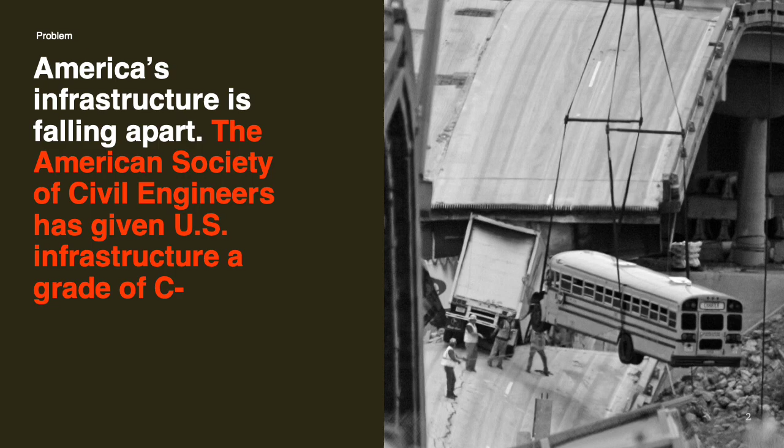The American Society of Civil Engineers has given us, our national infrastructure, a grade of a C minus. And just to put that into perspective for you, if our concrete infrastructure was trying to graduate college, it wouldn't have a high enough GPA to get a diploma. That harsh reality that I keep talking about is failure is not an option in our industry. When concrete fails, things get ruined, people die, it's a bad situation.

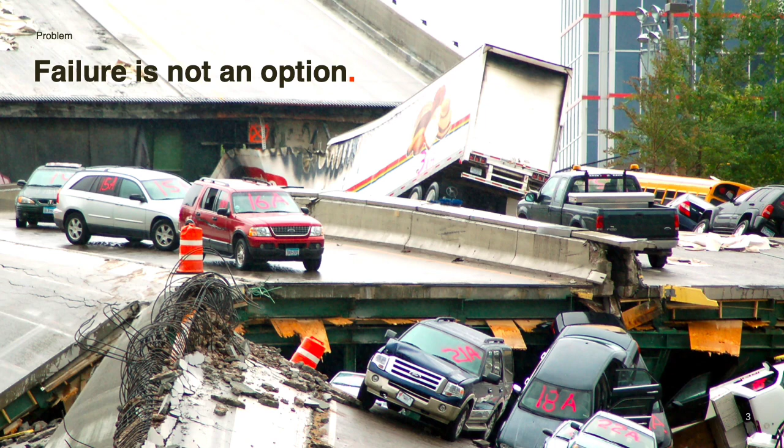Now, I'm not trying to say that the concrete industry is broken, but let me just give you one more fact here. Setting the stage, there are over 600,000 concrete bridges in our national inventory. This establishes a yearly budget of $48 billion into the concrete industry. Now, an additional $8.3 billion is put back into concrete every year to deal with the maintenance associated with physical and chemical attack.

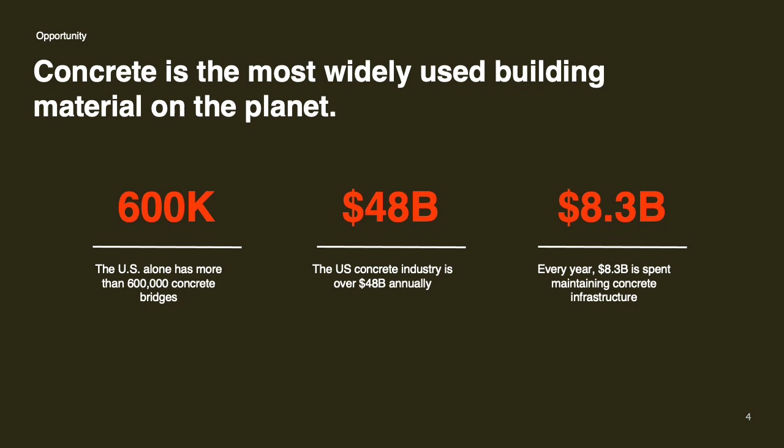Now, let's say I bought a truck for $50,000. And the first year I had that truck, and each year after that, I had to put in an additional $8,000 to deal with the maintenance associated with physical and chemical attack. Now, more than likely you would have a Ford, but taking it down to that level, we can all see that there is a problem that needs to be fixed.

The good news is that there is a solution to our concrete infrastructure problem. Take a deep breath. We know that the root cause of decay in concrete is concrete's molecular structure. I choose the pictures on here for very specific reasons. I want you to be interested in this, and I want you to see the science as not only one of our biggest obstacles, especially with things that we can't control like the ambient environment, but something that we can take advantage of.

What we know is that essentially concrete is a hardened sponge. Water, salt seeps in, evaporates out. Some of the salts stay behind, some of the water stays behind. You have volume change that leads to cracking. And deteriorated concrete from cracking is at the root of America's infrastructure problem, our challenges. And all of that is the concrete molecular structure.

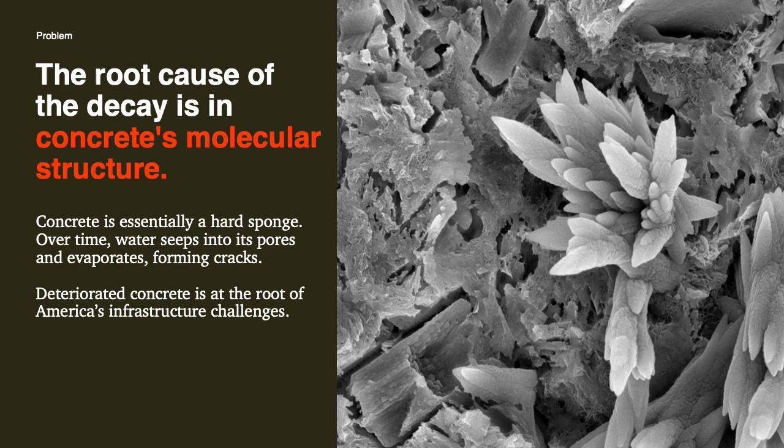Now, over time, this water migration and the salt deposition that I was talking about, those contaminants cause the slow breakdown and deterioration of concrete. Whether you're in Denver, on the left with alkali silica reactivity, breaking down the concrete from within, or if you're on the right in Tampa dealing with brackish water, chlorides and sulfates causing anything from calcium oxychloride formation to sulfate attack, reducing that cover of concrete over the steel and ultimately breaking down that reinforcement of concrete.

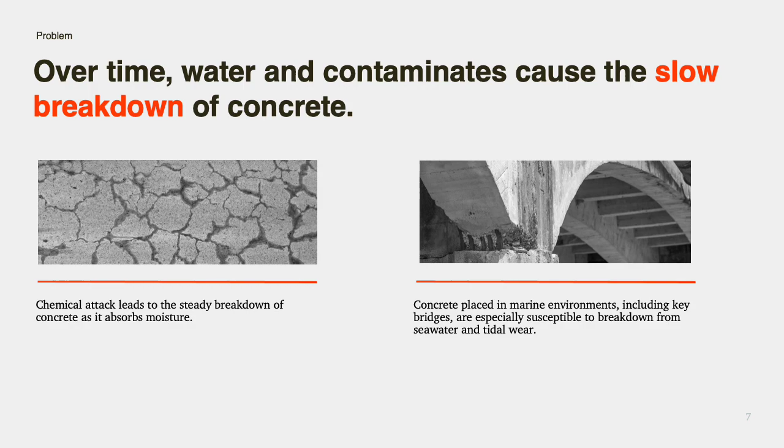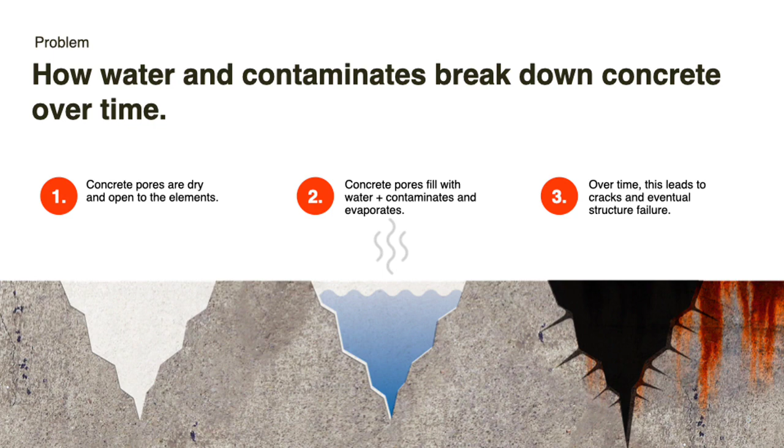And what that vicious cycle does, as I said earlier, is cause a volume change. And concrete doesn't like that volume change. On a scientific scale, you would say these atomic dislocations are not elastic, they're more plastic, and they tend to snap and pop, break and crack, creating more of that porous nature. And that water, those salts, ultimately reach the reinforcing steel, which causes that corrosion and bleeding and the contaminants and that vicious cycle I mentioned at the beginning of this slide.

We talked about a solution, and it's taken me 9 slides to finally get to that solution, but I wanted to paint that picture, not just the rudimentary illustration, but the water plus contaminants, because that's what hydrogels take advantage of. When we have a hydrogel, we're not putting it into brand new concrete. We're using it as a topical additive for deteriorated and damaged and cracked concrete.

The hydrogel technology is sprayed liberally onto the exterior of the concrete surface, and it seeps into concrete pores. Now, most hydrogels require a saturated surface dry condition for the concrete so that you have that known combination of water and those contaminants. And those contaminants, chlorides, alkali, sulfates, iron oxides, carbonic acid, could be a whole slew of things. The hydrogel solution interacts with these contaminants

and interacts with them in a way that starts developing that hydrogel technology that was originally in a liquid solution into a stacked 3-dimensional microstructure that has strength-bearing components to it, the very same strength-bearing components, assuming you have the right technology, that we find in our parent binding matrix, the calcium silicate hydrate. And over time, these hydrogels transform into more of that superhero, that backbone of concrete strength to heal those concrete pores.

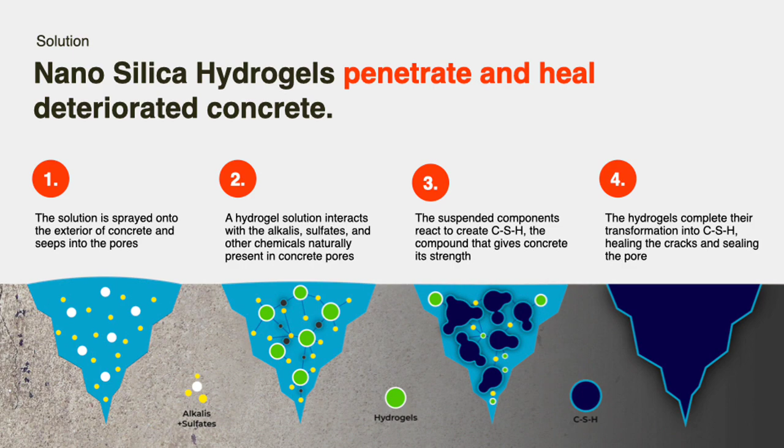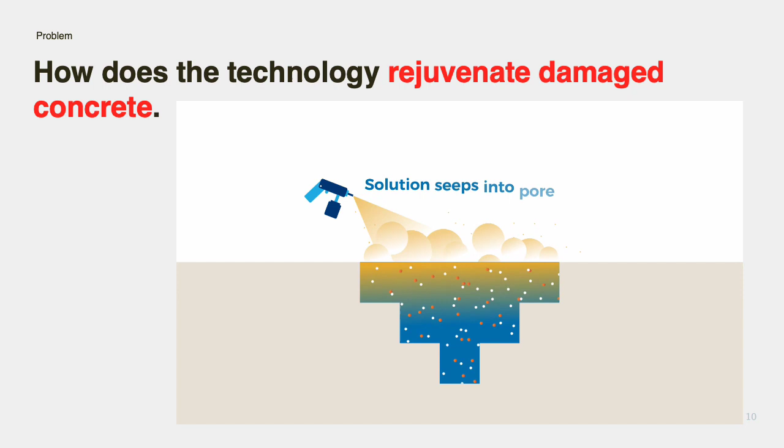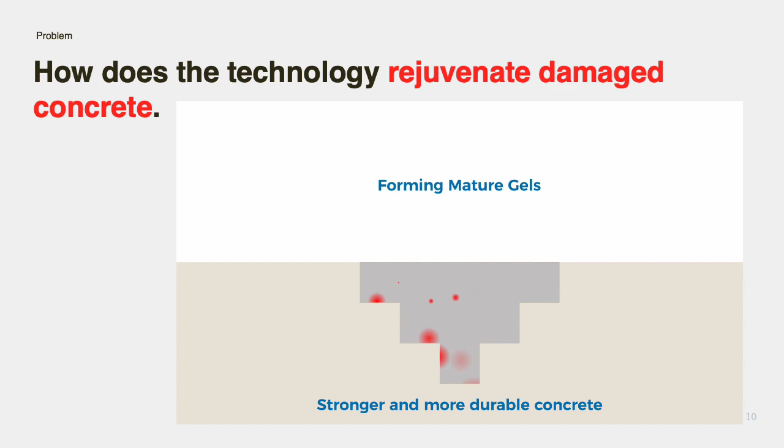Got a little animation here. So when we're using the technology, we have a concrete pore, saturated surface dry condition. We spray on the solution. It seeps into the pores, and this is where the polymerization process goes. Our immature gel leads up to a mature gel that ultimately makes a stronger and more durable concrete.

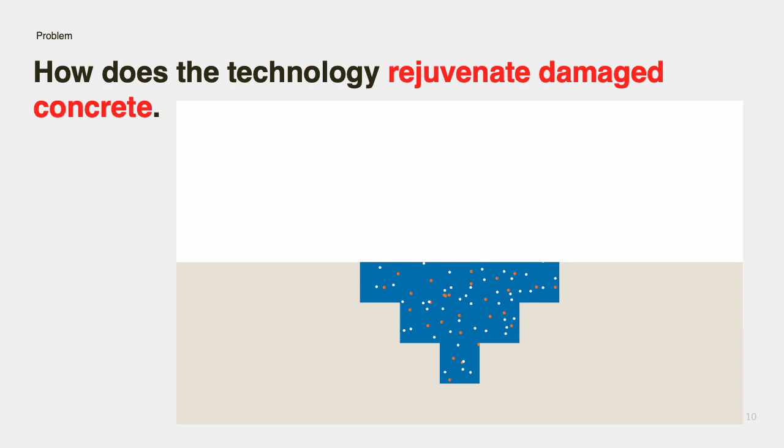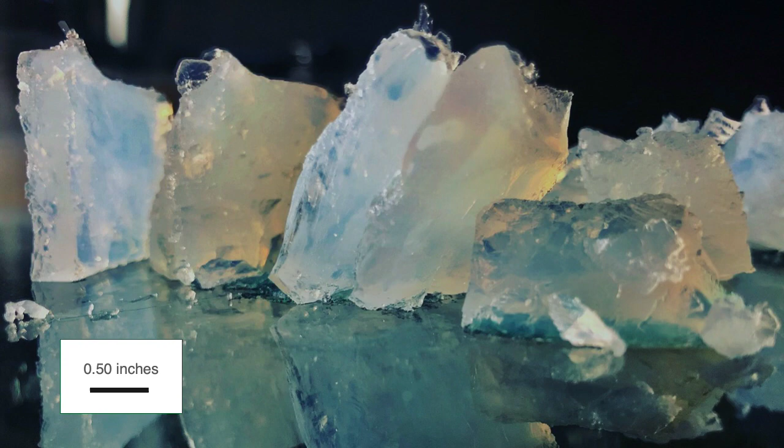When we get a chance to look at the hydrogel in a laboratory setting, this is the hydrogel. I mean, this is a few minutes after it's been combined with the simulated cement pore solution, and it has gone from a sprayable liquid to this hardened gel. And the hardened gel can hold its own shape. It can bond to the deteriorated and cracked and corroded materials in the composite structure of our concrete material, and ultimately lead to our biggest problem in the concrete industry.

We see this solution from the side of the engineers and the architects that hey, we're going to design a bridge that is going to last 50 years. And what that ultimately does to us is it forces a promise that we're going to keep a bridge or a concrete structure in place for this X amount of time. And if we don't keep it in place, then we fail at meeting that objective. So we find that our engineers in the different DOTs, as well as those municipalities, those marine entities, have to hobble the structure along. And we'll get into one of those case studies here in a second. In lieu of tearing it out, here's a great example.

The hydrogels have been found to extend the life of a bridge or a concrete infrastructure by 15 to 25 years, even if they're at the end of their design life, by taking advantage of that cracked and deteriorated environment. The increase in usable life of concrete pavements and infrastructure has also been seen to be increased by 30 and 50%.

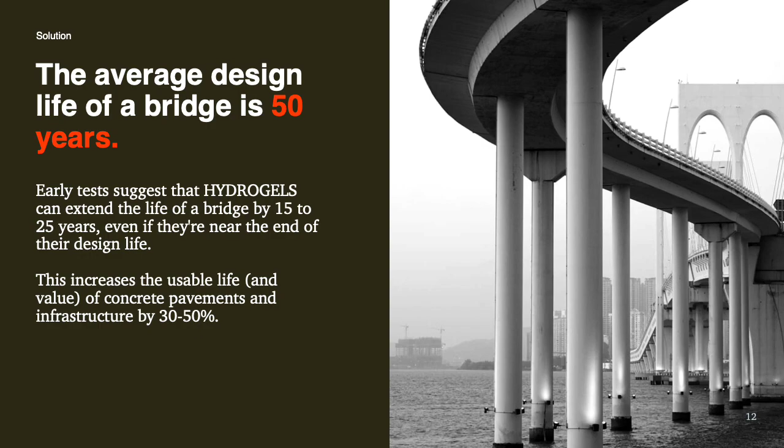And one of the projects that we're running in Fort Wayne, Indiana, is a concrete tunnel under a concrete highway. It was built 2002 and was going to be demolished, but with the help of the hydrogel technology that we've used here, and specifically this is a combination of products from Edyston, we found that we could effectively manipulate the molecular kinetics of this cracked and deteriorated concrete to slow the mechanics that cause this deterioration. You can see from this picture that we've got concrete on the floor. From the ceiling, you can see this cracked and deteriorated concrete.

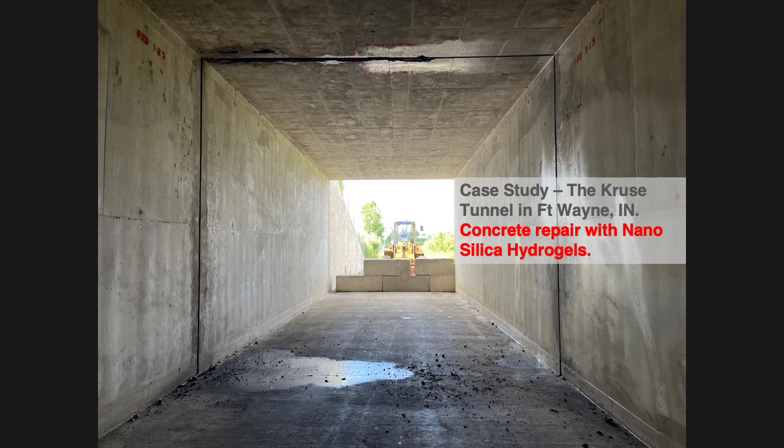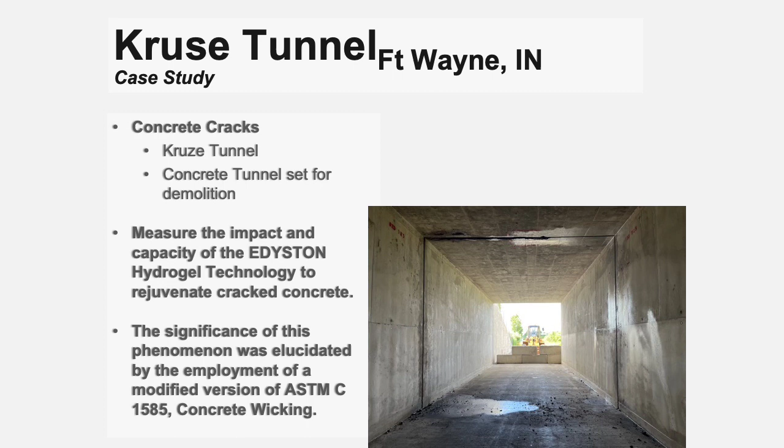Let me get into the case study. It was a Kruse tunnel. The concrete tunnel was set for demolition. Our job was to measure the impact and capacity of this Edyston hydrogel technology to rejuvenate cracked concrete. Now, significance of this phenomenon was elucidated by the employment and deployment of a modified version of a concrete wicking test. And we went out to the job site. We were able to show that the technology is extremely easy to use and fast.

The prep and application includes power washing the concrete to remove excess salt and weakened concrete. You allow the concrete to get to this saturated surface dry condition, this SSD condition, and then in multiple passes of 500 to 750 square feet per gallon, you're applying the hydrogel or Edyston technology to an ultimate dosage of 125 square feet per gallon.

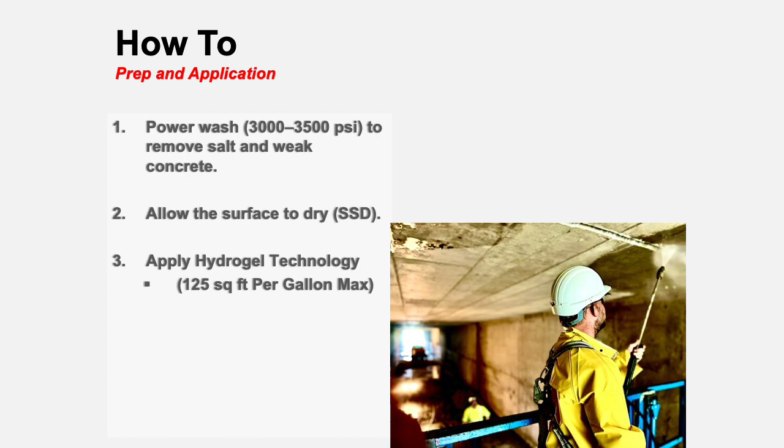And what we did for this Kruse tunnel project, we had 7 full construction joints over a total length of 400 feet. The construction joints were spaced 40 feet apart, and they were 14 feet tall by 16 feet wide. To evaluate how the Edyston impacted the concrete, we had a reference side. So every joint, we had a side where both sides were clean, but we had a side that we applied the Edyston, which you see is the left-hand side here, where it was cleaned and the Edyston was applied, and the right-hand side where it was only cleaned.

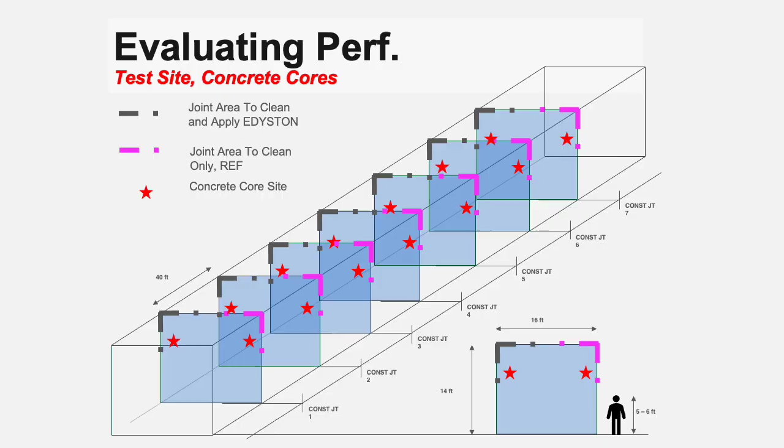Later on, 4 months after our application process, we came back, took some cores, took some pictures, and we measured the wicking or the concrete sorptivity using ASTM C1585.

So we had a number of joints where we used different types of the Edyston technology, but the ultimate combination based on the deterioration was a use of two different types of hydrogels that not only densify the permeable deteriorated matrix of our concrete composite, but also use the impurities to create that healing matrix that can be comparable in strength and durability to the parent material. Here was the dosage of those two different materials.

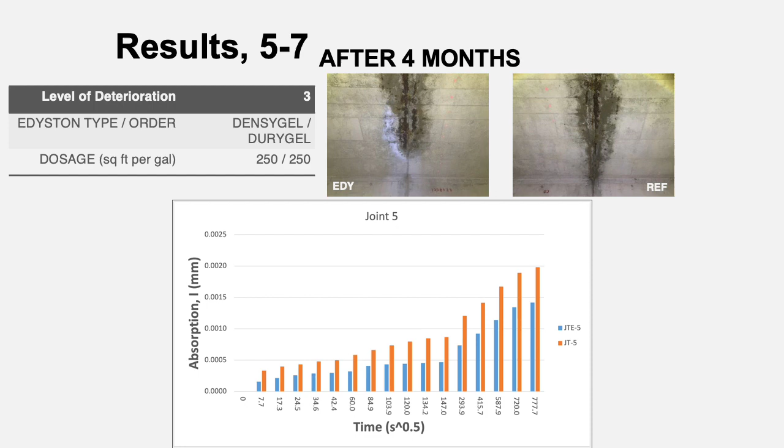And when we took those measurements using ASTM C1585, albeit a modified method, we saw up to a 30% reduction, 40% reduction through our primary and secondary absorption. And going back to some of the other joints, it was consistent throughout the 7 different sections where we're seeing this reduction in migration of water through the concrete.

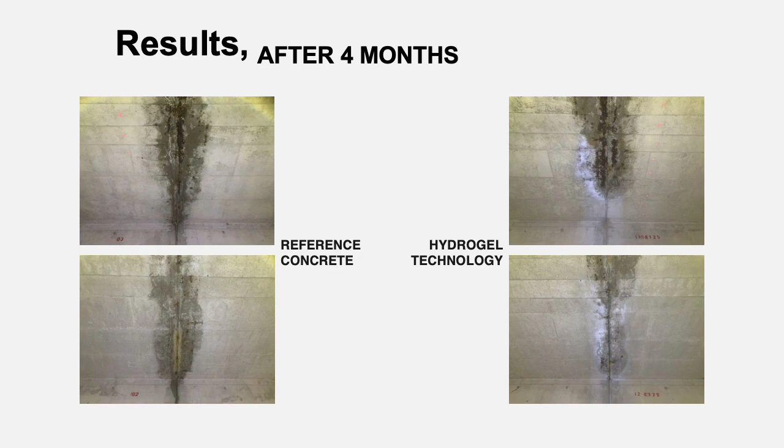And ultimately, we're not seeing that the Edyston is a concrete sealer. It's just the opposite. The hydrogel technology, the Edyston, works with the water to create more of that backbone of concrete strength. So effectively what that means is if you still wanted to put the Band-Aid on there, on your deteriorated concrete, especially if you've had a lot of mass loss or concrete cover loss, you could do that after applying the Edyston. Figure the Edyston is the antibiotic to your Band-Aid.

And wrapping up this case study, this is what we came back to 18 hours later. There was a significant amount of rain. These joints had no flashing over them, so water was just seeping through. But the next day, you can see the difference where the Edyston, the hydrogel technology, had an impact of reducing that water flow through the concrete joint and through the concrete, while the reference concrete,

you can see where the Edyston is applied. It's like bacitracin or Neosporin. It has that shininess to the surface after it's first applied. And then looking underneath the joint, you see that reduction in water flow.

So the question is now what? We've sat through this 15, 16-minute presentation. You've got this information. Now is the time to act. This is a very easy technology to apply, to get out to the job site and then apply, and then easy to test later on. And getting to work with hydrogels,

there are plenty of folks out there that can help you out, from universities to the competition. The folks that we work with do a wonderful job of informing the end users of what the technology is, how to use it, which is very palatable to the industry, especially the time we have on certain job sites, and are excited to get in touch with you. And like I said, there's just too much damaged concrete to go around. Let's take advantage of this technology.